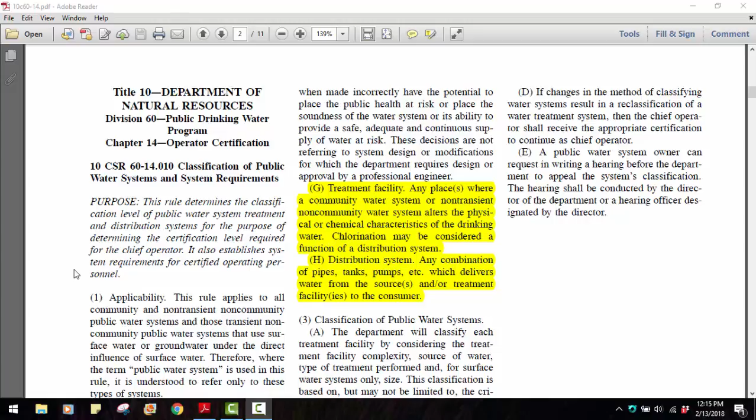And as we roll on down into it, we'll see that they even break the subchapters down into like an outline, ones, twos, and threes, and A's, B's, and C's. Let's just roll on down through here and hit a few highlights that we want to talk about. Highlight here, certified operator. That's what you'll become when you hold a valid water treatment or distribution certificate of any level issued by the department.

And chief operator, we read about that a while ago. That's your certified operator actually in charge with the overall responsibility of day-to-day process control, system integrity decisions, supervisory operational activities that will directly impact the quality and the quantity of drinking water. Right now, you're assigned to an operator, maybe not the chief operator, but someone is designated as a chief operator. That's the one that makes the operating decisions.

And here let's look at where it says operate, and there's a good reason for this definition. To make or act upon process control system integrity decisions regarding a water treatment facility or a distribution system. The chief operator is in charge. This is not the mayor; no one can make operational decisions here but an operator. At some point in time, you may have to argue this fact with someone that thinks they're in charge, who may be in charge of you, but they're not in charge of the water because they're not a certified operator.

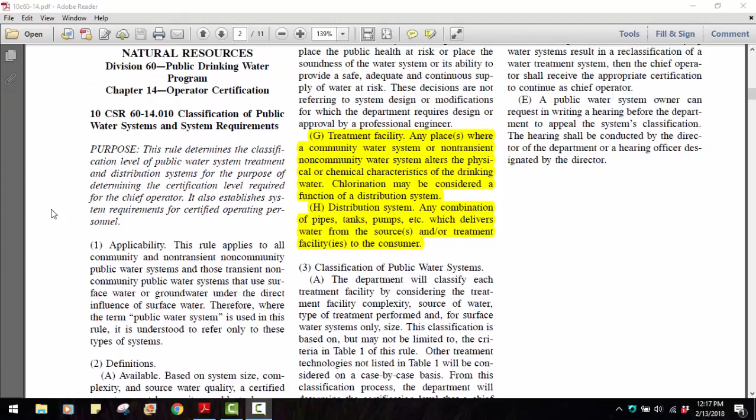Okay, let's look here at these two definitions. Treatment facility, and that's your water plant, and then distribution system. Treatment facility: any place where a community water system or non-transient, non-community water system alters the physical or chemical characteristics of the drinking water. Chlorination may be considered a function of a distribution system. I wish they would have put that separate instead of in that paragraph, because DNR does not figure chlorination as treatment because it doesn't really change the characteristics of the water.

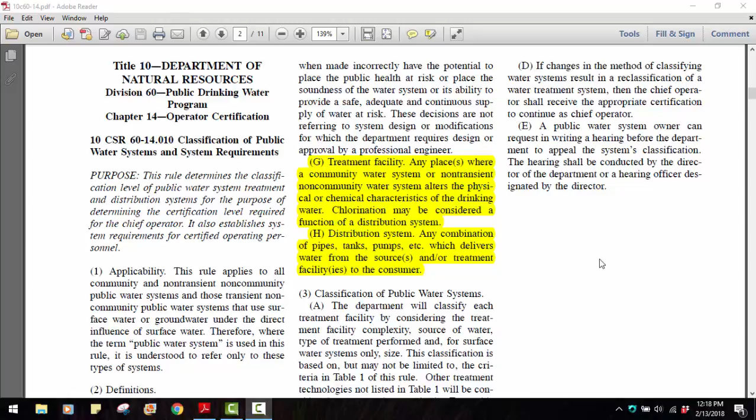A distribution system is any combination of pipes, tanks, pumps, etc., which delivers water from the sources and or treatment facilities to the consumer. Now, as you saw in our above reading today, there's two different certifications. There's a treatment certification and a distribution certification. And as we run through here, you saw a partial breakdown of that in the above reading. And here you see this is the water treatment system classification. They're broken down into A's, B's, C's, and D's.

Like you see here, this groundwater under the direct influence of surface water is a B. Now you'll hear this at various times in your career, and groundwater is like a well. Surface water, like here, is just that, it's surface water. It's a pond, lake, river, wherever your water comes out of. Groundwater is like a well.

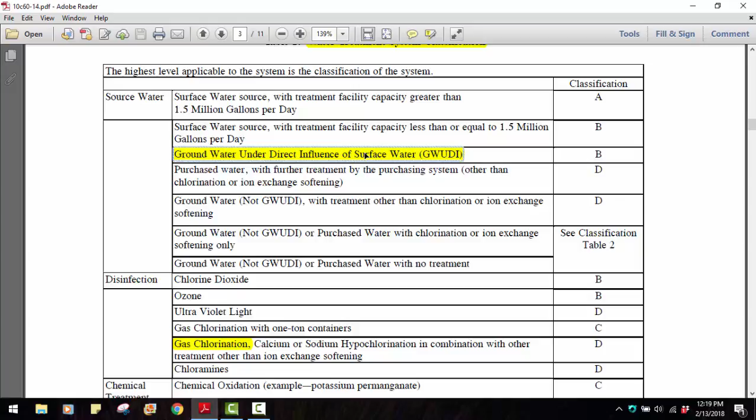Now, what they say under the direct influence of surface water is if it's in an alluvial plain that's gravelly and it's on the river bank and it's actually the river water, it's under the direct influence of surface water. And sometimes if your well casing is leaking or something, they'll put you under the direct influence of surface water, because what it means is other water is getting into that and influencing your water quality. Okay, to go on, gas chlorination takes a D level, D being your lowest level. Aeration, we see a lot of aerators in different parts of Missouri, especially for iron removal, a D level.

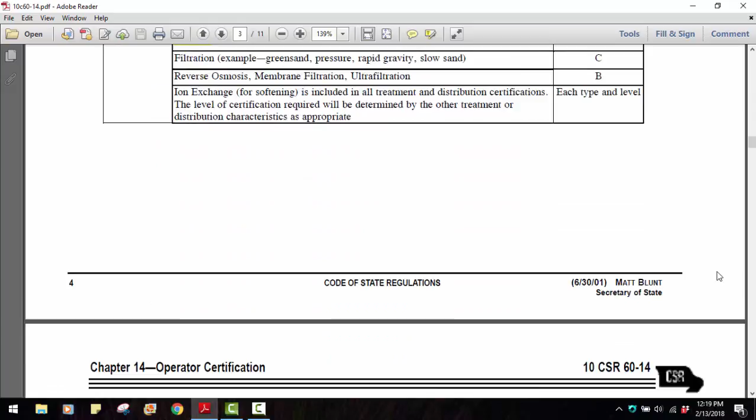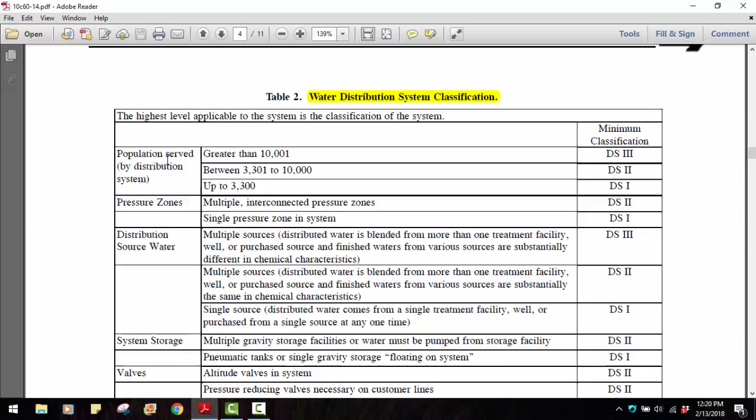So let's cruise on down here and look at the water distribution. And that is DS 1, 2, and 3. We saw this chart up in the reading. And not only is it based on population, but it also has numerous various things that can change the system. It's the characteristics of the distribution system which defines the classification. Like this one here, let's look at the altitude valves in the system. Altitude or pressure reducing valves make it a DS2. A little bit more complicated.

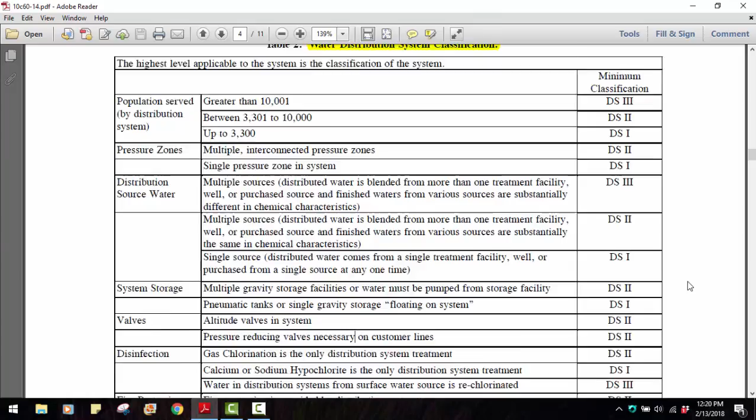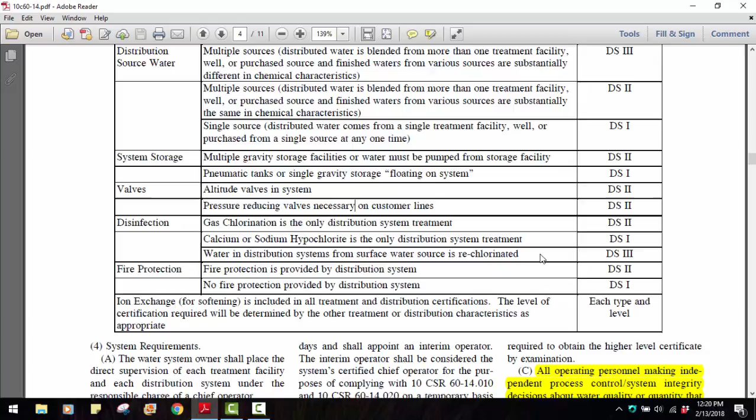Actually, a one is a simple system, a two is a more diverse system, and three is your higher class system with real high population. And sometimes, like here, from a surface water source that is rechlorinated, that's a three. So it all depends on the characteristics of your system. Like here, multiple sources, if they're different characteristics and are blended, that takes a DS3.

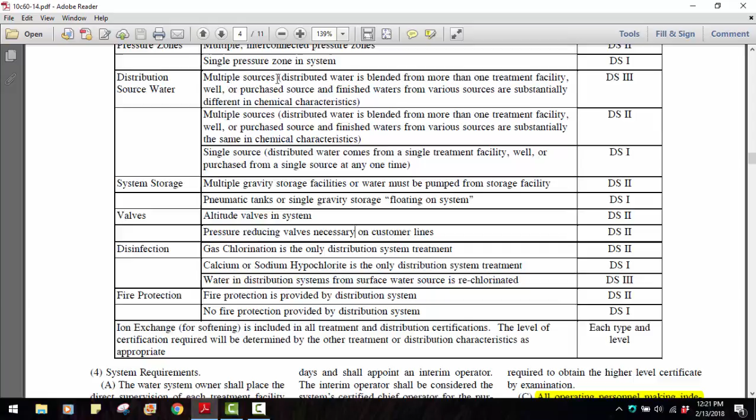As we roll on down, we need to know here that public water systems shall have a contingency plan for a standby replacement chief operator to be available at all times. DNR requires that you have a backup operator. That's all that means, so that if something happens to the chief operator, there's a backup operator that can take over. Another thing that you'll need to know, and this is probably going to be on your certification test, maybe: the owner shall notify the department in writing within 10 working days after the chief operator is replaced. In other words, DNR wants to know if your chief operator is gone. They want to know who's in charge.

Let's see. All operating personnel making independent process control system integrity decisions about water quality or quantity that affect public health must be certified. So that's back to where your mayor can't make water quality or control system changes and decisions because he's not certified. Now, if he's certified, that's a different story. He needs to be chief operator if he's certified, if he's making decisions.

And this is just another breakdown of that, where all decisions about water quality or quantity that affect public health must be made by a certified operator based on procedures approved by the chief operator. Just another thing to show that the chief operator is just that, he's chief. And he's got the responsibility on his shoulders because his name is on the line. As we roll down through here,

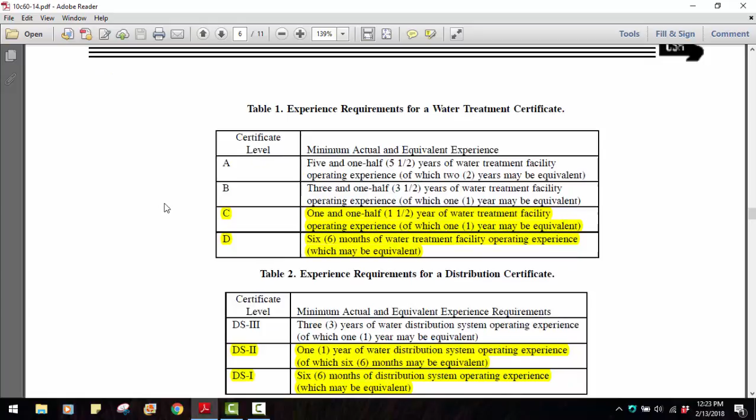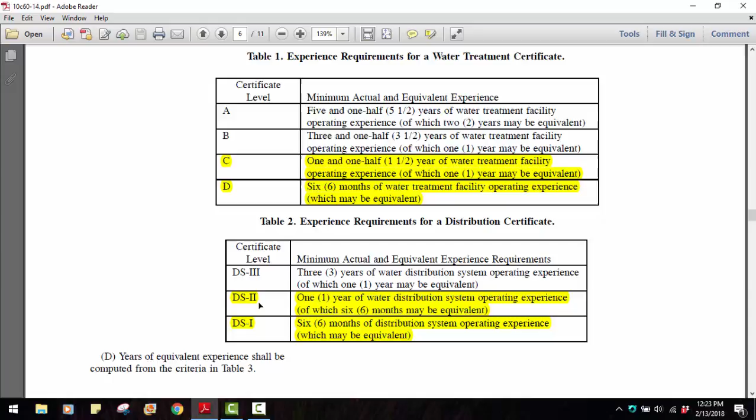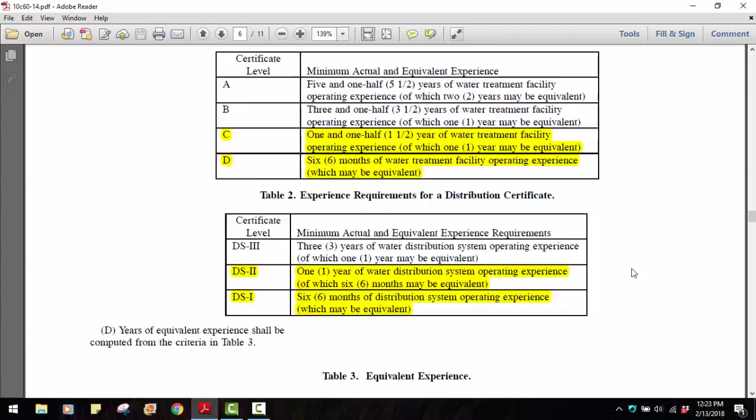here's your levels of water treatment, A, B, C, D. And in this 2-year program, you can get the C or the D, and the DS2 is the same way. You can get the 1 or the 2. And this shows how much experience you have to have, and your 6 months can be offset also by your certification course that you'll be taking in class. So this is what that is, a Department approved water treatment training course for the water treatment and one for the distribution.

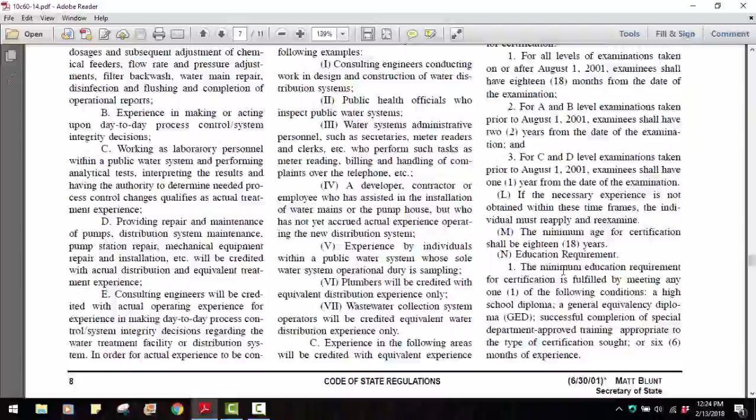So when you take the operator certification course, it gives you this equivalency to where you can go ahead and get your certification quicker that way. Okay, let's roll on down through this. Don't think there's anything important that you must know on this. This will be gone over again in your certification class.

Okay. Application for certification examination. When you go to cert class, you'll fill out your application there. The main thing is, remember, it says right here, must be received by the department at least 30 days prior to examination date. Don't fool around and not send it off. Fill that dude out and send it off immediately. If you got to have somebody sign it, get it signed, but put it in the mail yourself. Don't wait for the clerk or somebody to forget to put it in the mail.

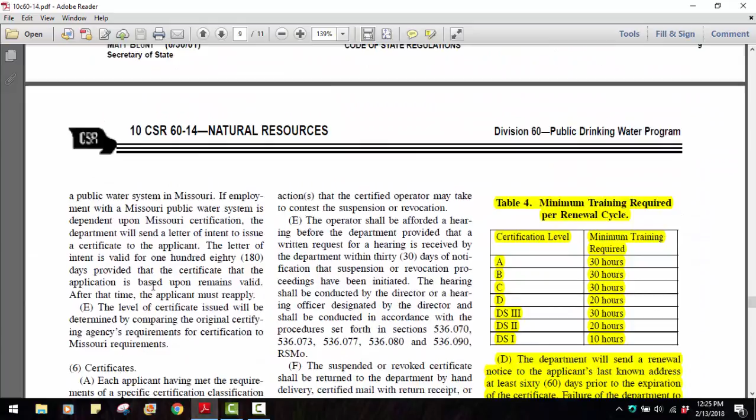Because what you don't want to do is miss that test at the end of your certification if you can get out of it. The quicker you can take your test right after your certification class makes it a lot easier to pass that examination. A passing score of 70% is required in order to become certified. That's something you will want to be aware of. Okay, now here we go.

Your operator certification certificate will be for a 3-year period. And in that 3 years, you will need these number of training hours to keep your renewal. So let's say you take a DS2 here on this line. In the next 3 years, you'll need 20 hours of renewal certification hours. So one good thing is with Missouri Water, we have the best training available, of course, and we have the best conferences available. Each conference will have about 10 hours training. So once you become certified, if you go to one conference a year, you'll have plenty.

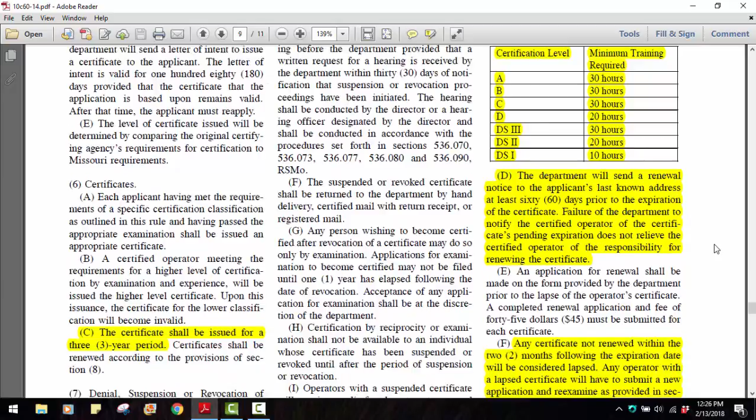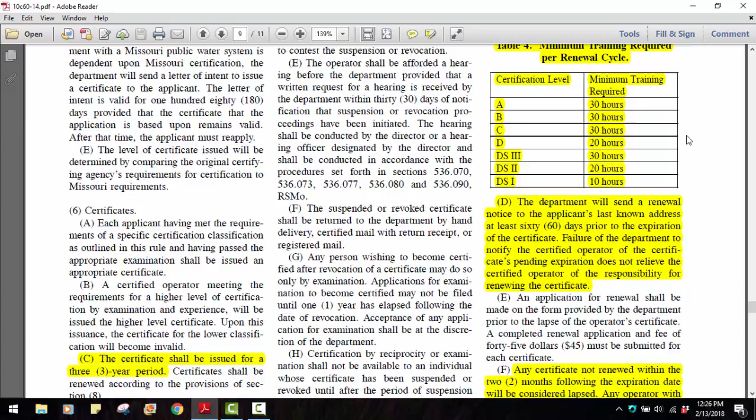The department will send you a renewal notice about 60 days before your certificate expires. However, they go by the information you have supplied. So what it amounts to is it goes to your last known address. And if you've moved, well, here it says right here, any operator with a lapsed certificate will have, okay, that's another thing. Excuse me, we'll do that in a second.

If you've moved and they don't know your forwarding address, they will not send it to you, and your certificate will lapse. So you've got a little bit of time afterwards to pay a fee and go ahead and renew it. But the thing is don't let that certificate lapse, or you'll end up taking the test over again.

Here's where we were stumbling a while ago. It says any certificate not renewed within the 2 months following the expiration date will be considered lapsed. So you can fudge a couple months, but don't do it. It is not worth it. Any operator with a lapsed certificate will have to submit a new application and re-examine all over again.

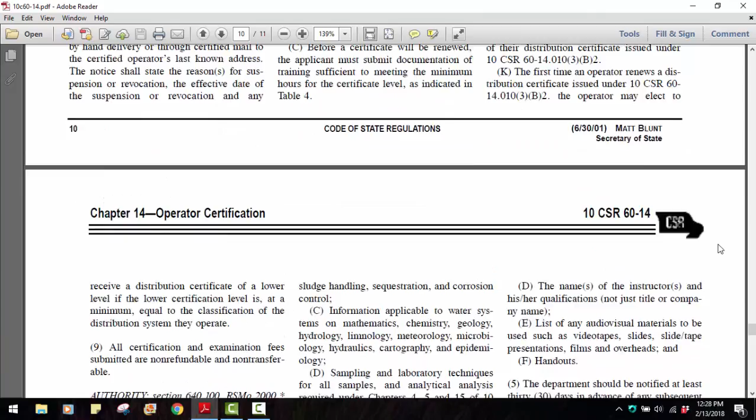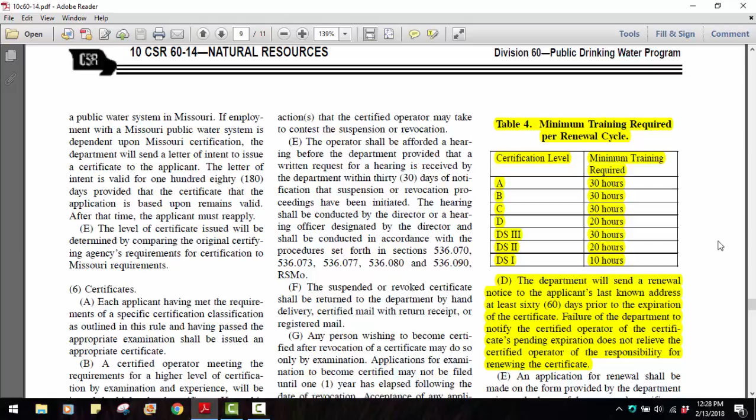And after 2 years, you'll be needing to take the certification class all over again, because a lot that's on the test is not every day applicable. So a refresher course would probably be desired at that time if you had to take it again. The thing is, don't do it, but keep your certificate up, keep all your information current with them if you move, and you'll be in good shape.

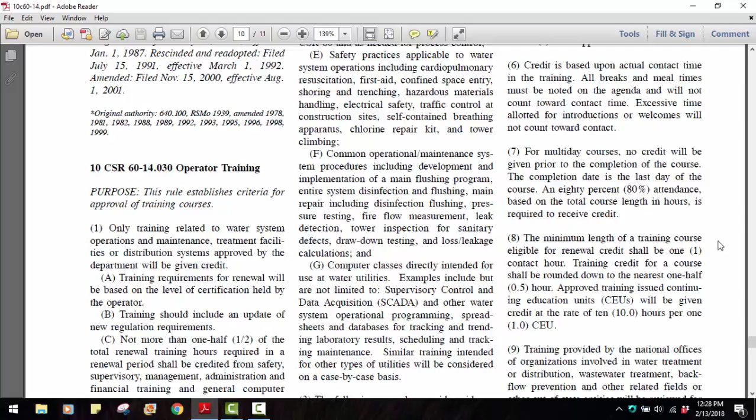Okay, that pretty well sums this up. The rest of it is about classes and how to submit a training class and all, something you don't have to worry about.